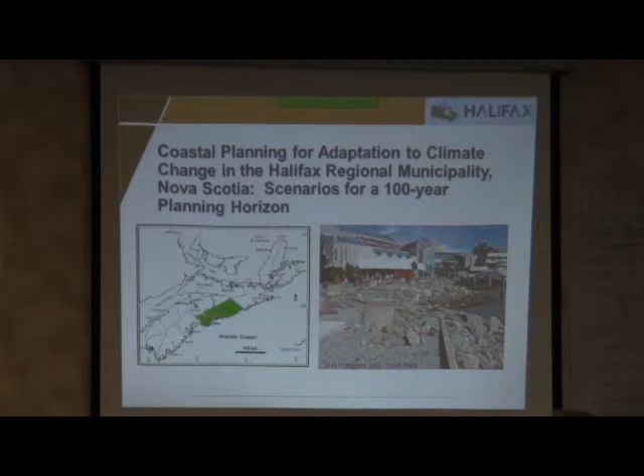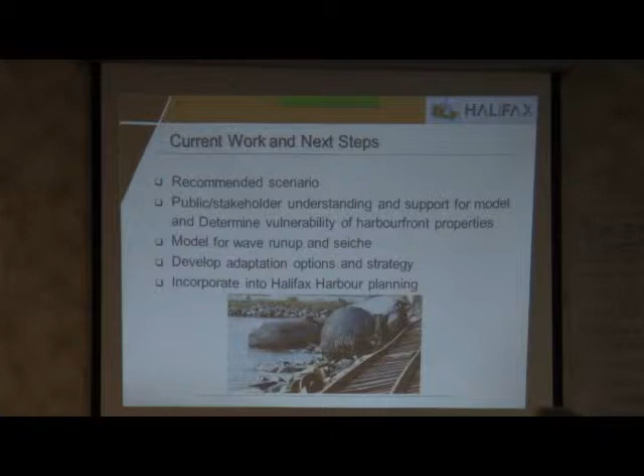So, current work, next steps. Remember those purple checks? We're still working on the public and stakeholder approach, and we did our initial regional plan. It came through in 2005, 2006. We've just finished a review of that plan, and we've come out with new amendments. So we do that every 5 years.

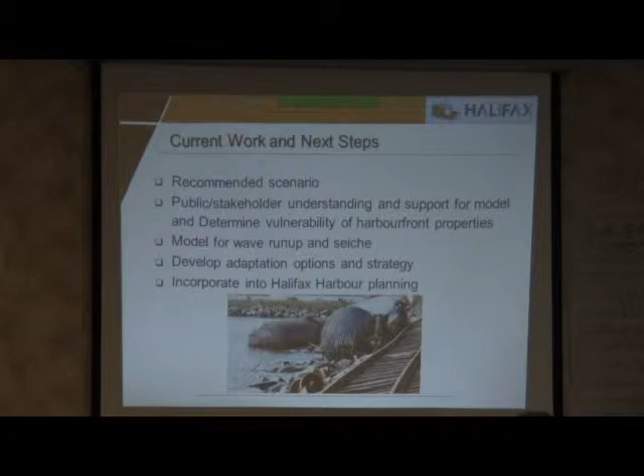So we did have a lot of stakeholder consultation there. Halifax Harbour planning has been incorporated into our regional plan. I would have preferred it if it had been a separate plan, a standalone, but never say never, it may come back. So you can see the policies that we adopted in 2006 with the first regional municipal planning strategy, E16, and then the amendments we made to it in 2014 on E22.

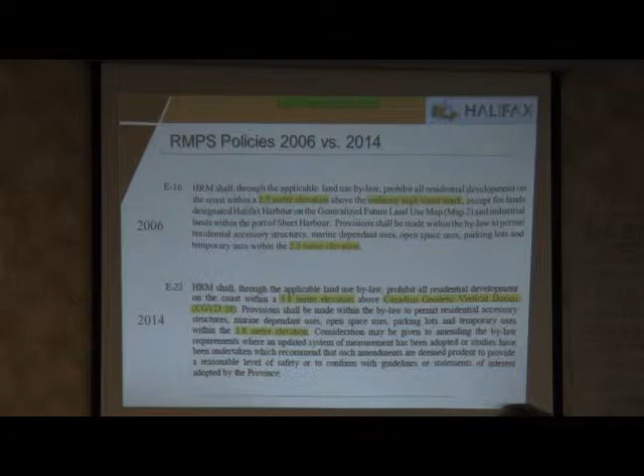Little bit more information, a little bit more accuracy. So we started with 2.5 meter elevation above ordinary high water mark. So rather than establishing only a horizontal setback, we also, and this was the first time I believe in Atlantic Canada, established a vertical setback. So you had to satisfy the vertical setback as well as the horizontal setback in order for residential or any type of coastal development.

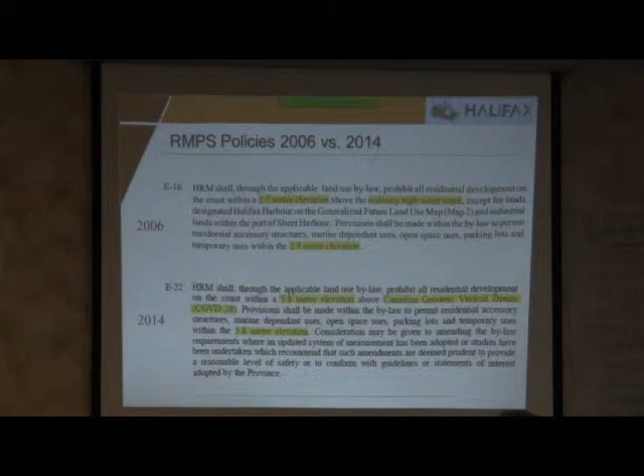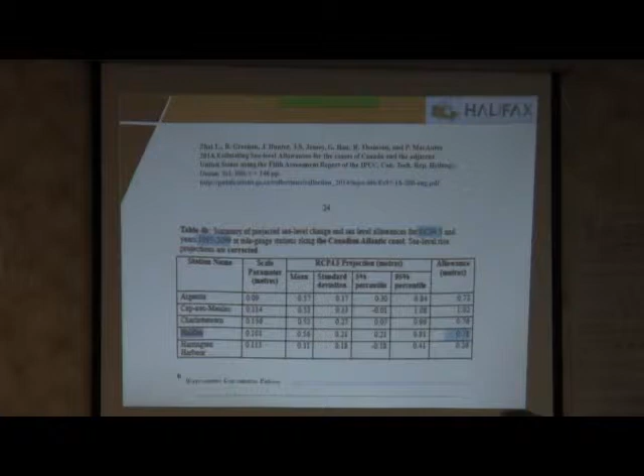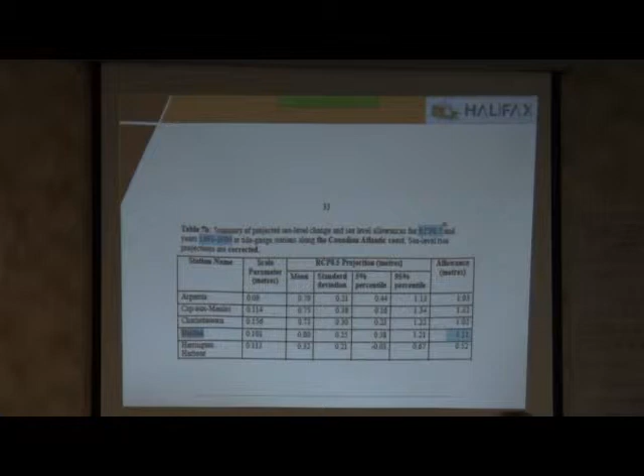We just introduced a little bit more certainty for that in E22 because ordinary high water mark is sort of a fuzzy line. We started to incorporate some of the representative concentration pathways for AR5, and you can see Halifax at 0.78, and then under 8.5, 1.11, and then see that overall time. So going back to what we said about scenario 2, scenario 3, not too bad.

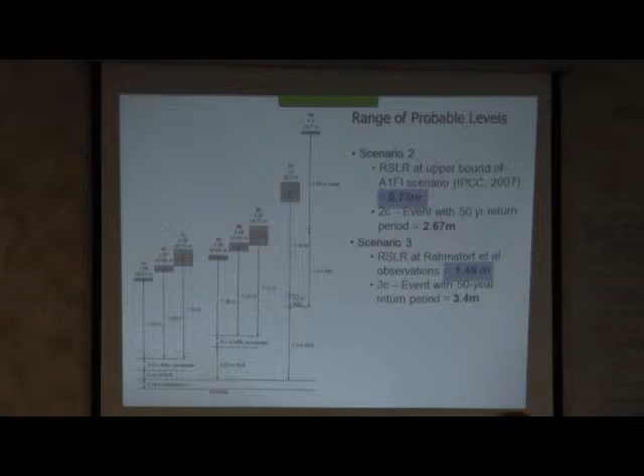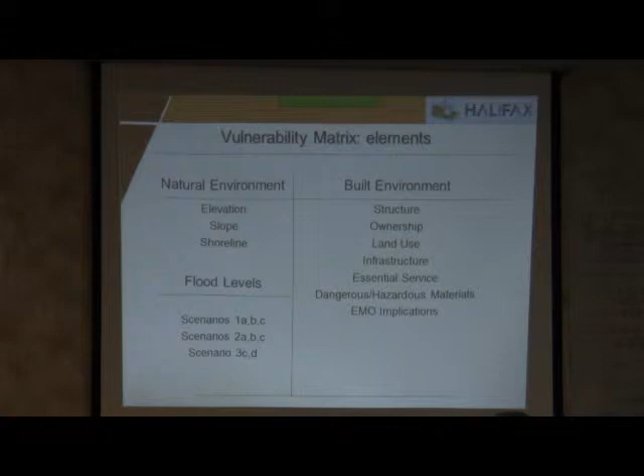Now some of the products that we've looked at, especially from land use planning, is to take this information that we have about sea level rise and apply it to the built environment and the shoreline knowledge that we have around Halifax Harbour. It's basically a Boolean approach. It either is or it isn't, but where you have land uses coinciding, say with hazardous waste, vulnerable population, et cetera, the more of that taking place in one given area, the higher the vulnerability. So the darker the purple, the higher the vulnerability.

We originally did this in red, amber, and green, but then we saw that the message of red to the general public is one of warning, one of danger, one of we're sending out an alarm. We don't want to send out an alarm. What we want to do is have a valuable planning tool.

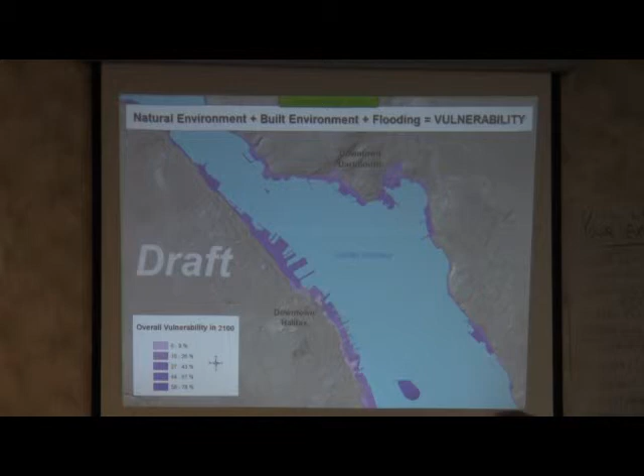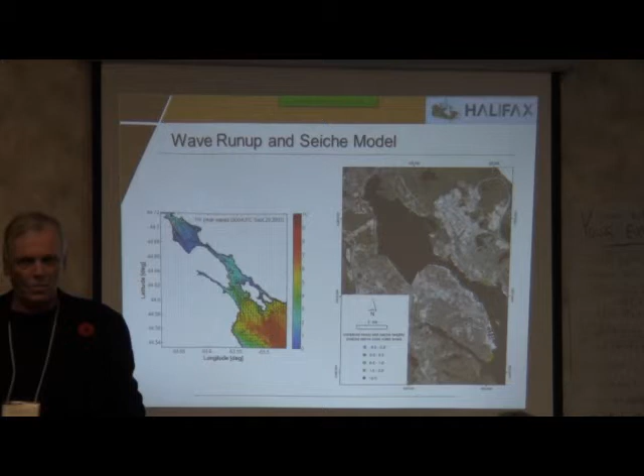One of the other models that we've been able to run, and this was done by Will Perrie and Fumin Zhu, was a wave run-up and seiche model. So it's not just the sea level rise in the harbour. It's areas where we're going to get some activity in terms of wave run-up, and that's proven to be very valuable. So current work and next steps, I'll just get into that.

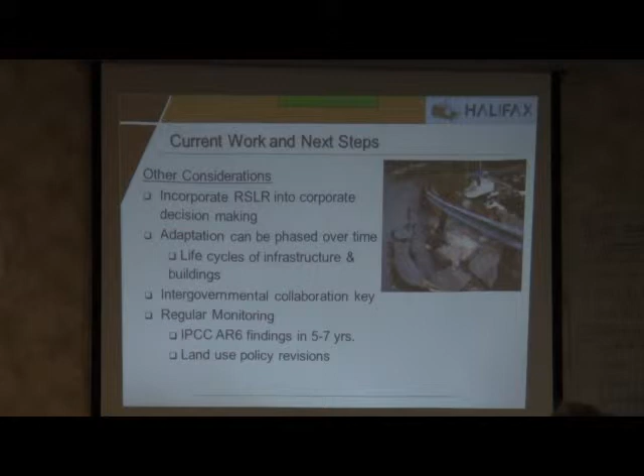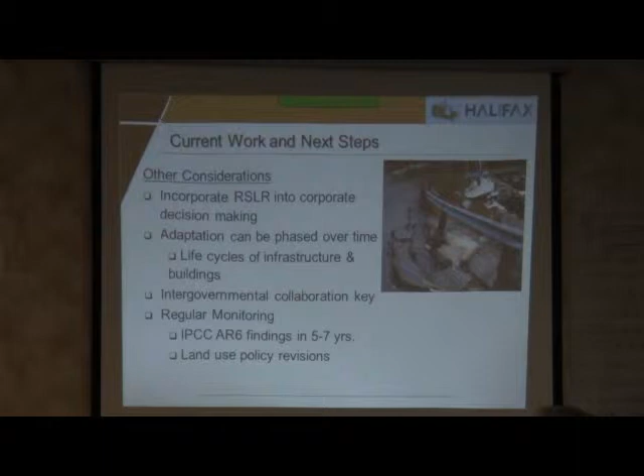We have been incorporating the whole idea of sea level rise into all of our corporate decision making, which has been a great move forward. So all of the infrastructure work that we're doing, everything is sort of viewed through that lens. And I think we're getting back to the point where it's been sort of a dry spell over the last few years, but intergovernmental cooperation and collaboration was key to the success of this program, and I think we can return to that very shortly.

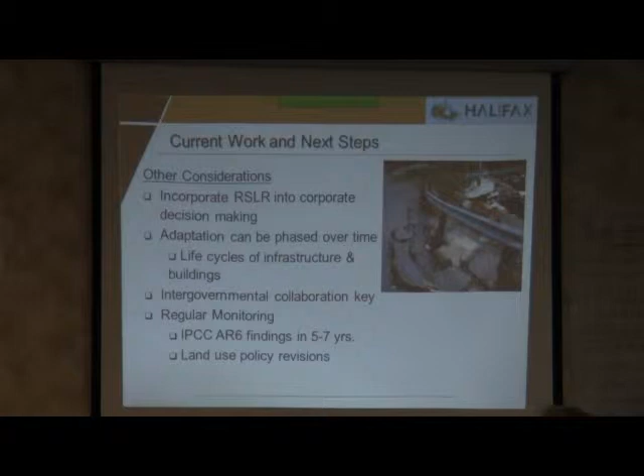So here's a couple of the projects that we've done. So we did Point Pleasant Park wave and storm modeling, Northwest Arm seawall restoration, Cole Harbour Marsh. So we were talking earlier about the bathymetry. We had some good luck on this, and this bathymetry didn't exist before we partnered with Public Works Canada. They actually used one of their pontoon boats to go and grab that bathymetry for us,

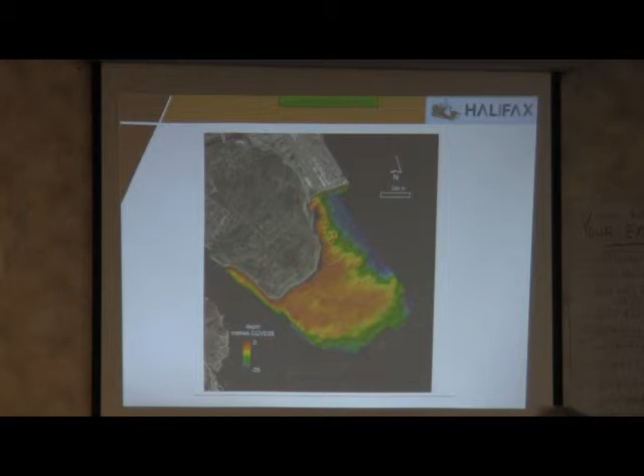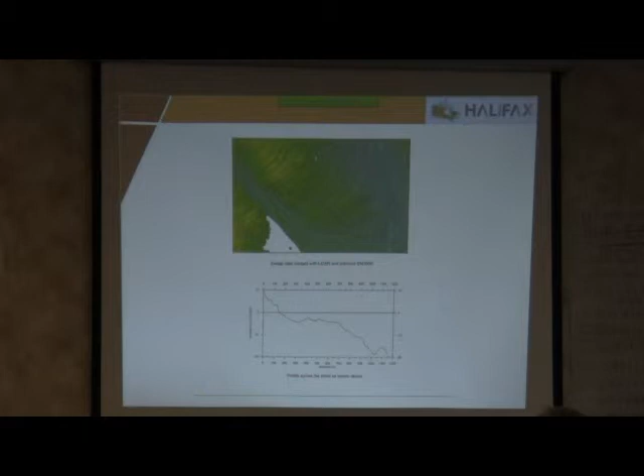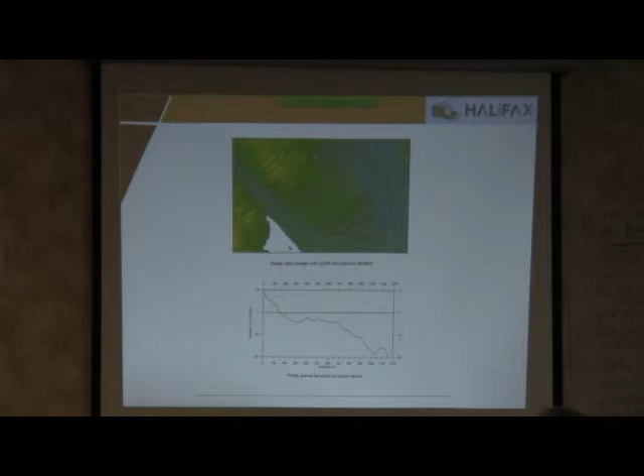because Point Pleasant Park during Hurricane Juan lost about 15-20 meters of shoreline inland, and so we wanted to have a greater understanding of what the wave regime was there and what we could do to save the park. And so you can see what we did was we took the bare earth, bathymetry, did a nice interpolation there, and got that information, which was key to doing our wave run-up. And this is actually where Coldwater came in. Mike Davis, I don't know if any folks here know him, but it was great working with Mike.

So we started looking at that. And so this is one of the areas where we lost the most shoreline. So all of that information was then incorporated in the Point Pleasant Park Comprehensive Plan. And it explained that that was the area with the highest dynamic shoreline, and nothing should be built there. Nothing. That we would basically let it erode, because it would be trying to sweep back the sea if we did anything at that point.

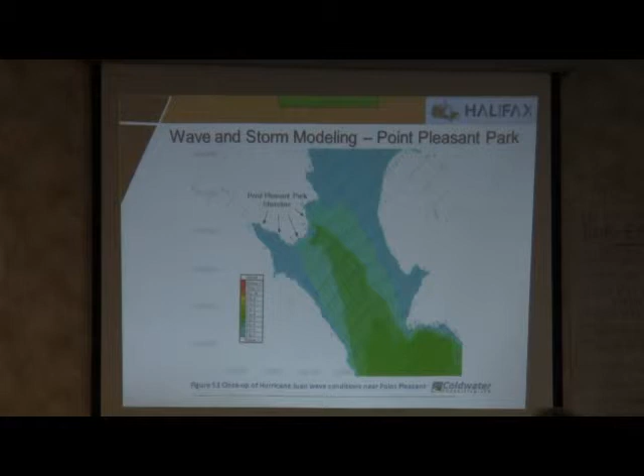So that's it. And so there's part of that plan, and that plan is being implemented. So a do-nothing plan, but hate to say it, but that was it.

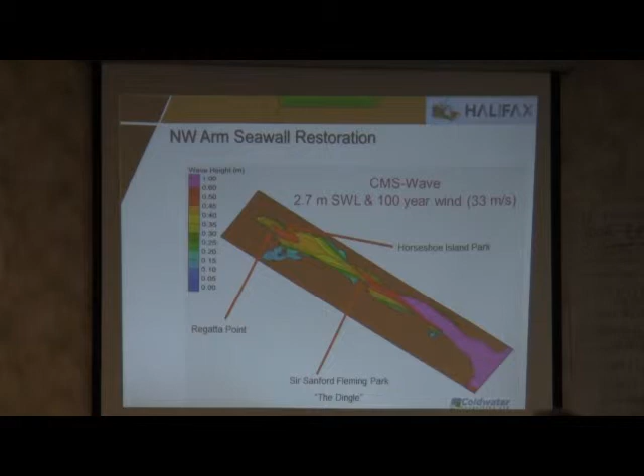Yeah, and that lawn that you see down below, Sailor's Way, on the Point Pleasant Park. So there's a roadway and then just lawn and shoreline. And so we call that the tidal lawn. And so there you go.

Northwest Arm seawall restoration. So if you can imagine the Armdale roundabout as being up here, you know, the Dingle, Regatta Point, Horseshoe Island. So this is the sort of wave energy that occurs in the Northwest Arm. And who would have thought that it would be that powerful that far up? But it is, with certain winds. And what was happening is a lot of that wave energy was destroying our seawall system at the Dingle.

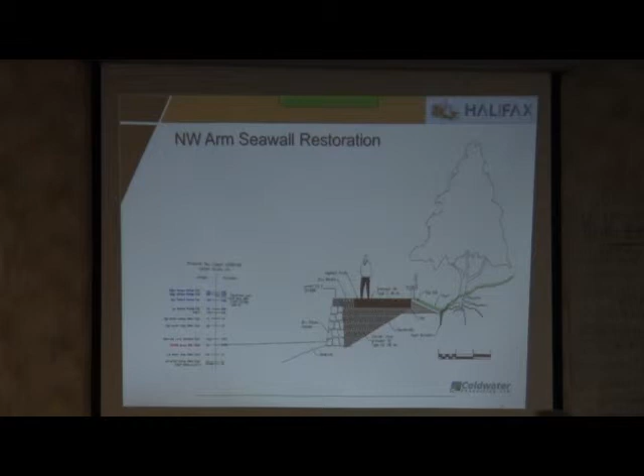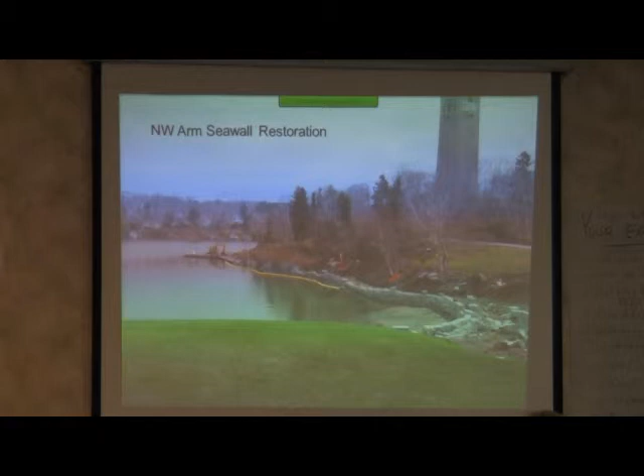So again, I worked with Coldwater on this one, and we came up with a new adaptive seawall system for the Dingle. And there it is being built. That was the first stage, and we're now going into the third phase. Altogether, that wall plus work at Regatta Point and Horseshoe Island is going to be around $30 million. But it's over a 10-year period, so it is doable.

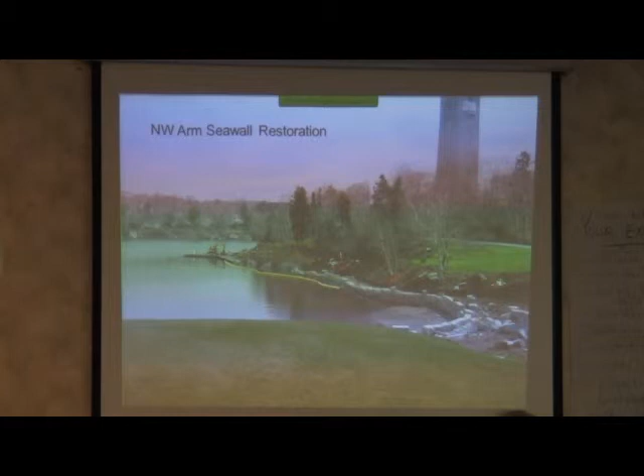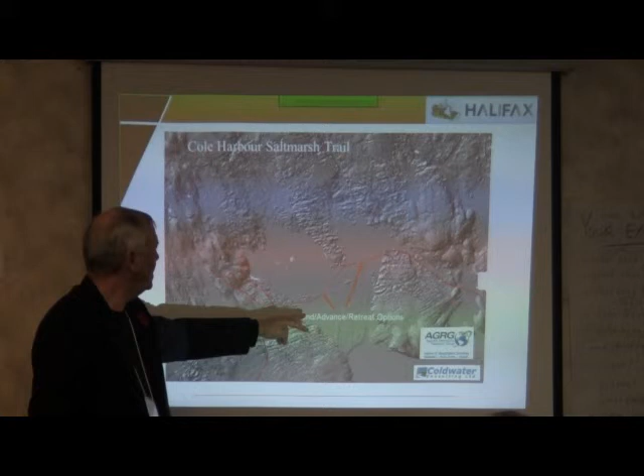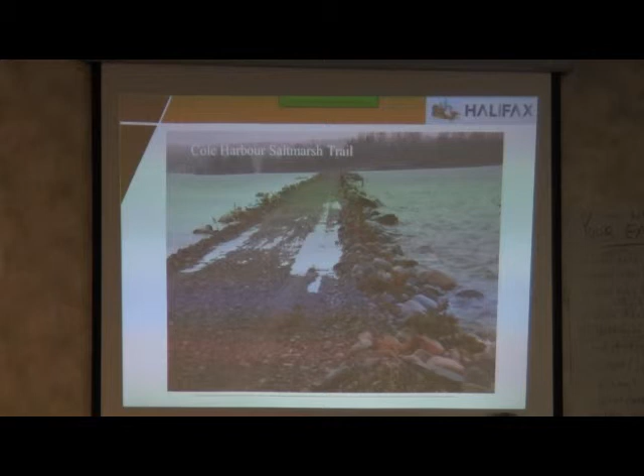Cole Harbour Salt Marsh Trail, we had sort of that defend, advance, retreat option there. This is Cole Harbour Marsh. And there's a beautiful salt marsh hiking trail that goes across the marsh on an old rail line. But even a nor'easter takes a lot of it out.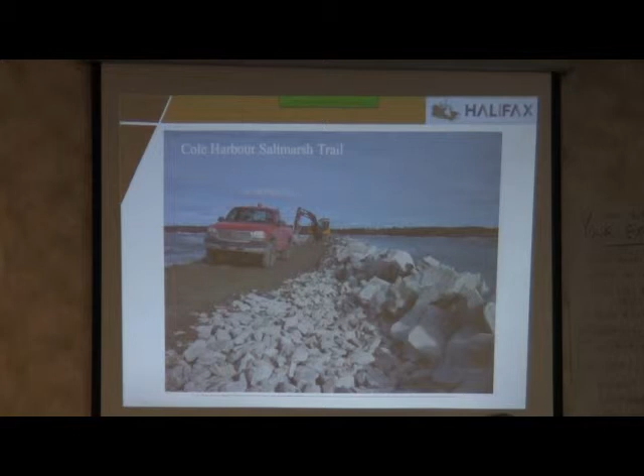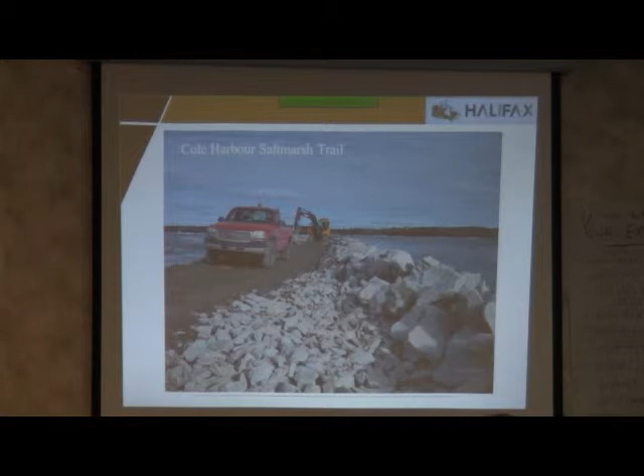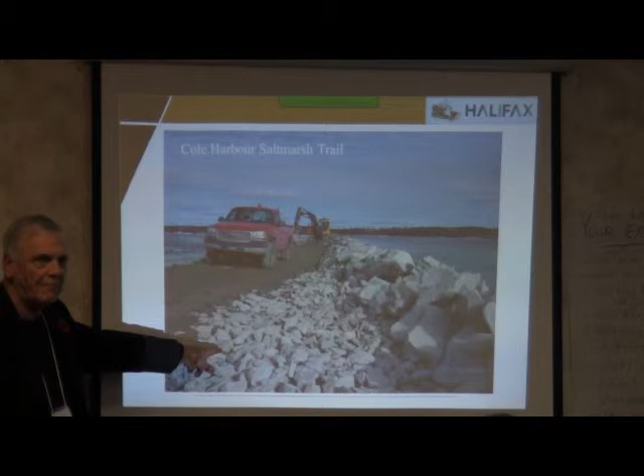So we looked at that. Our advice in our report was to do a partial retreat. But the community group that operated this area said, nope, they're going to defend. So they started adding rock, but our wave calculations showed that that rock would be picked up by waves, and what was a more appropriate size. So at least we were able to provide some engineering information for them.

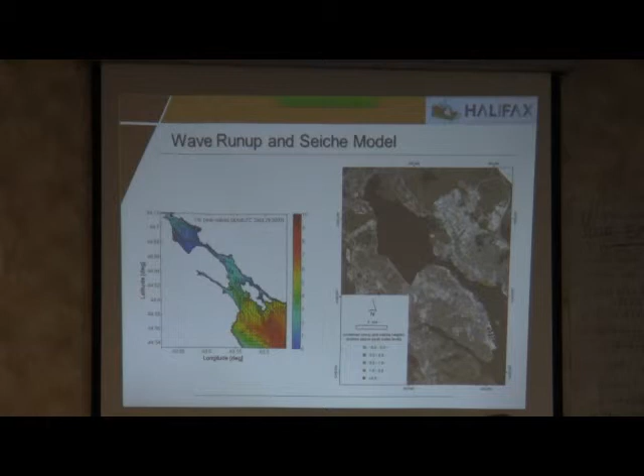So going back to that wave run-up and seiche model, it's nice to know, how does that work? And all of a sudden you go, oh, there's Dartmouth Cove. And that was one of the most dynamic areas going. What's going on in Dartmouth Cove? Massive development now called King's Wharf. And residential development, condo development, you name it. And it's all taking place right now.

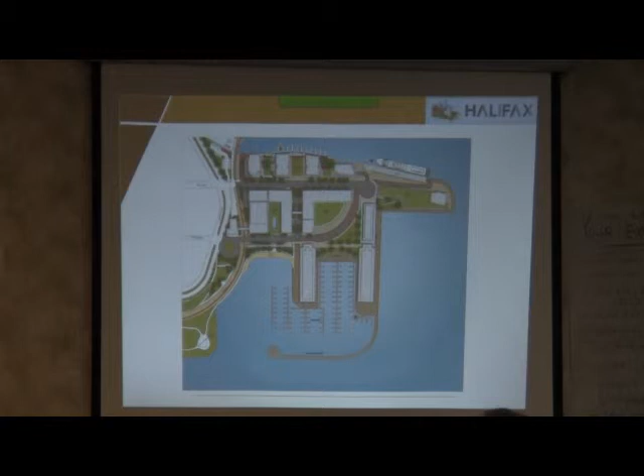So you can see up here what's taking place. Down here, there's Dartmouth Cove, and that's a whole new development that's going to be taking place over the next few years. The good news is that we gave all of the LiDAR information to the consulting companies. So EDM Limited had the LiDAR data for King's Wharf. CBCL had the LiDAR data for Dartmouth Cove.

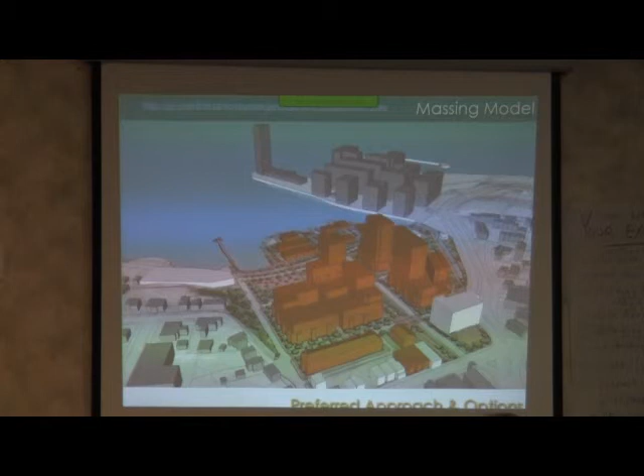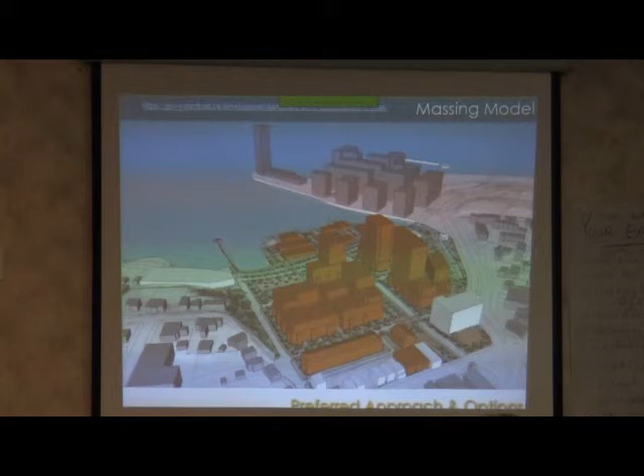Good news is that the first base floor elevation for residential housing for King's Wharf is 11 meters above sea level. We changed our policies too over the years not to allow any residential development at base floor. Only the second floor of any coastal development around the harbor is permitted to be residential. Is base floor commercial? Questions. It's at ground level. Yeah, yeah.

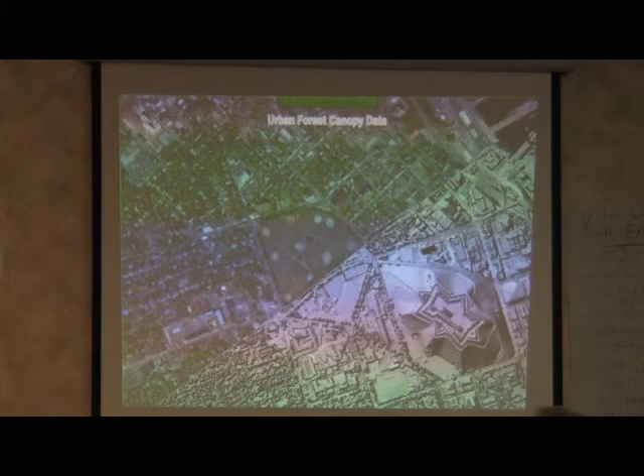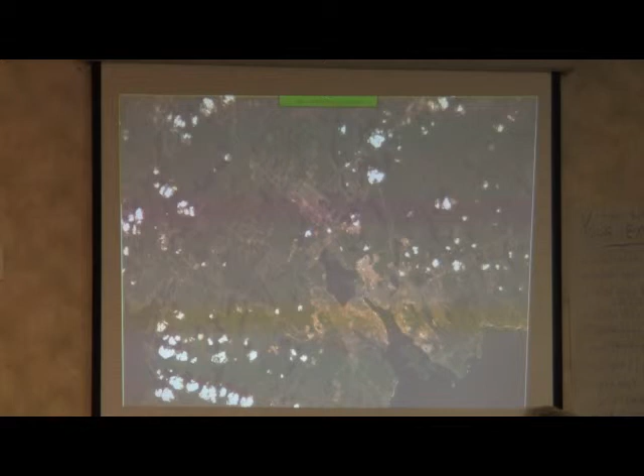We've also taken the LiDAR and combined it with QuickBird satellite imagery to create a Canopy Height Model, which has been fantastic for us over the last few years. So we were able to identify canopy at a community level and at a neighborhood level. So there's North End, for example. So we've been able to calculate exact levels of canopy at a neighborhood scale.

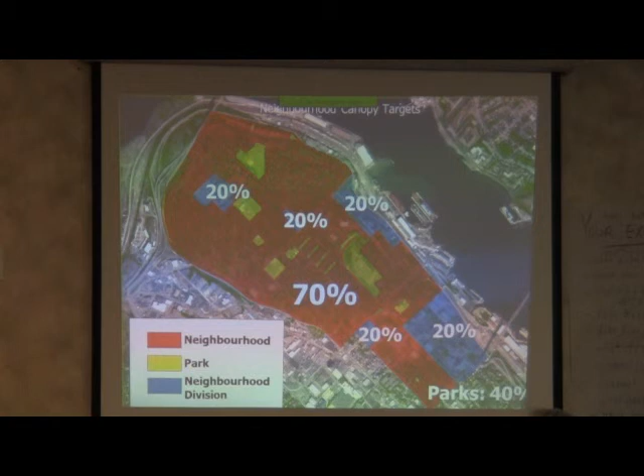But I've got one more thing. I feel like Steve Jobs here, yeah.

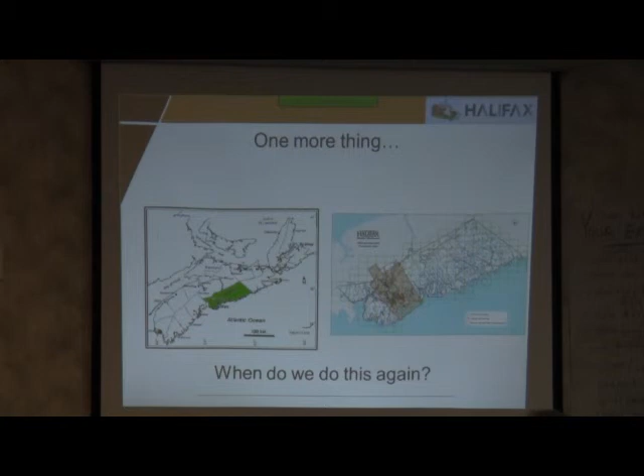Our question is, we did this first in 2007, LiDAR for a portion of HRM, and when are we going to do it again? And my big question is, why not all of HRM in 2016-17? I've got the support of senior staff in HRM to look at flying the whole municipality at that point. But once you start looking at the whole municipality and the patchwork of LiDAR coverage that we have in the province and the age of it and the impossibility of stitching it together, why don't we do the whole province? I think it's time.

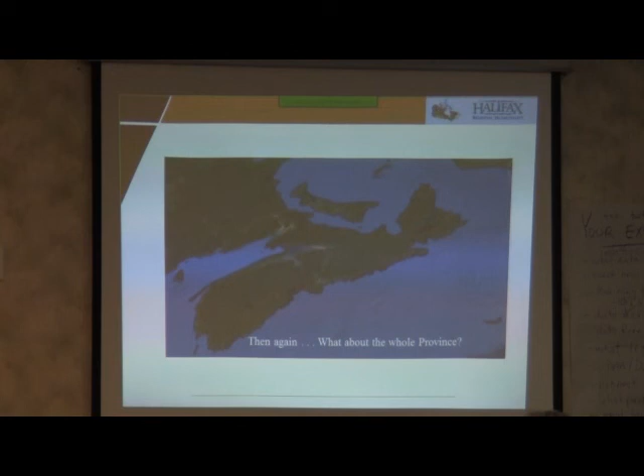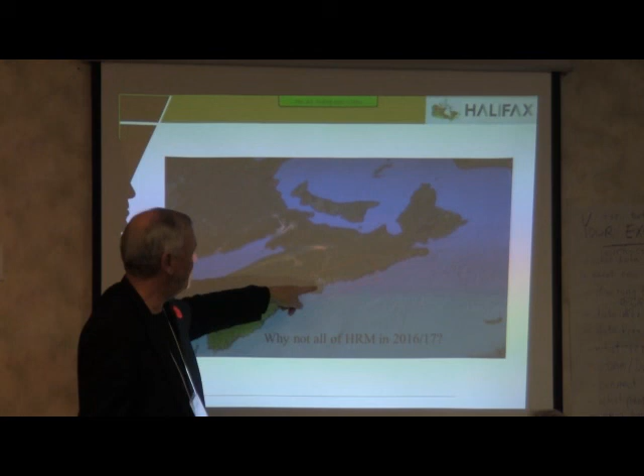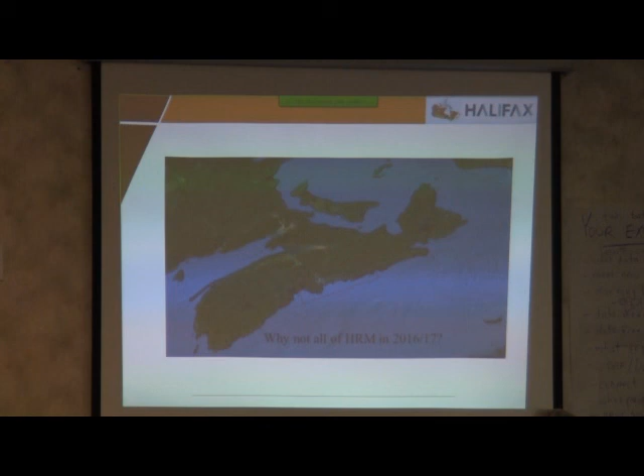Because if we started looking at just a flight pattern for all of HRM, then we would preclude wise flight patterns for other parts of the province. So if you look up here and go, how would you fly this? And what about up here? Wouldn't it be better to move it that way? So I don't have any answers. It's just a question. But I think we've reached that point where we've seen all of PEI done, and I think this is time to look at the whole province.